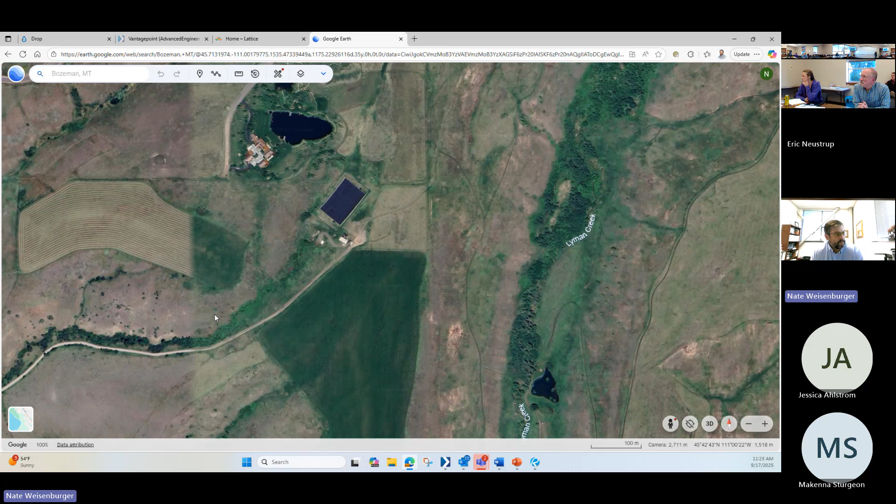There's a treatment building located to the south of that tank, where the chemicals are stored and the equipment doses chlorine into the water to provide disinfection consistent with what the sourdough plant provides on the south end of the community. The transmission line comes down into the community, crosses the interstate and railroad corridors, and enters the city's distribution system on the northwest or northeast side. Under average demand conditions, it provides adequate working pressure to pressurize a good share of the northern end of the community.

There's a Pear Street pump station located up in that northeast side of town, recently improved. During peak demand, that pump station can elevate the pressure to boost the system line from the Lyman system into the distribution system. Griffin, you might have a good understanding - I can see you with the way the owl is looking - do you have anything to add about the Lyman system?

Only thing I would add is that prior to the transmission getting to Pear Street, it does provide distribution support along the way. But yeah, that's a great summary, Nate. Thanks, Dave. You're welcome.

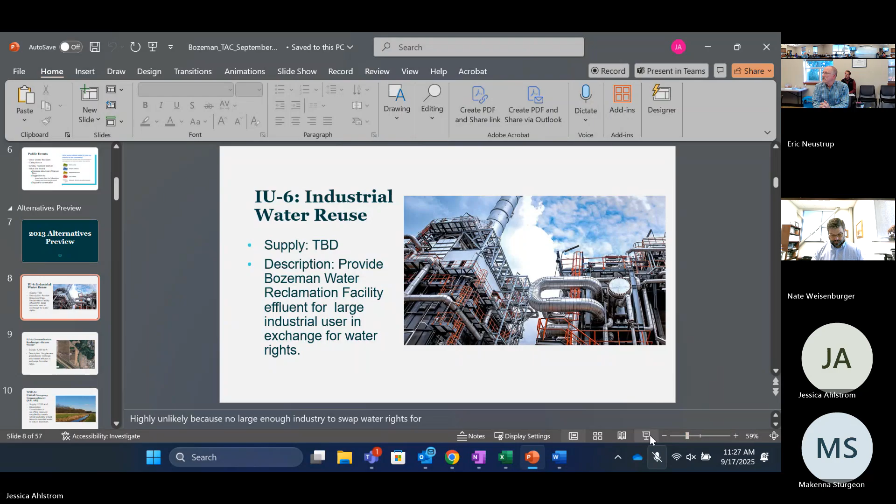One other general question - in going through some of the issues we've already covered in more detail, I've been generating questions. I don't want to bring them up in this group right now, but what's the best way to bring them to the table? Should I put it in a letter format, email it, and to who, the group? If you could get back to me on what you think is the best way to address that, that would be great.

Okay, so IU again stands for integrated utility. 6 is just the 6th integrated utility alternative that was developed previously. And integrated utility alternatives largely surround reusing water reclamation facility effluent to work.

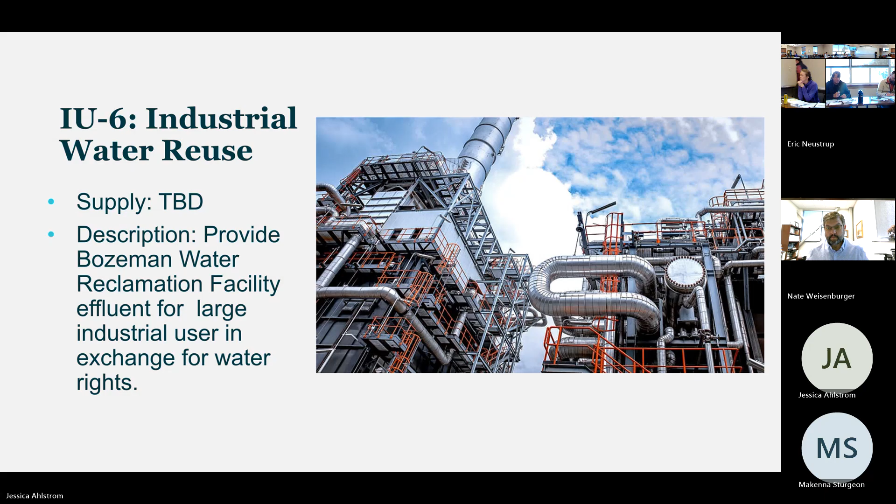I guess one of the buzzwords in the industry right now is data centers. Some data centers use water on a closed loop basis, but some use it on a pass-through basis for cooling. So you could consider some type of industrial reuse for supporting a data center interested in locating into the Gallatin Valley area. Great idea, though I think there are limitations on Northwestern Energy's side to support data centers - there's been a couple articles about that.

That reminds me, one other question I wanted to ask is whether the city knows if we have any businesses out there with open loop cooling systems, using a fair amount of water on a commercial, maybe not industrial, basis for cooling purposes. I feel like that's something we're looking into more - like geothermal heating and cooling? Yeah, it could be geothermal or for cooling equipment, but my thought was that going forward, the city should require those systems be closed loop systems, so they're not consuming water.

Yeah, that's on our radar. A lot of the systems - I can't speak to Darigold specifically, though their use may indicate single pass cooling - but a lot of cooling systems are single pass cooling. It's cheap and fast and cools quickly. So yeah, I think that would be a great alternative to explore for the demand reduction side, with additional cooling regulations.

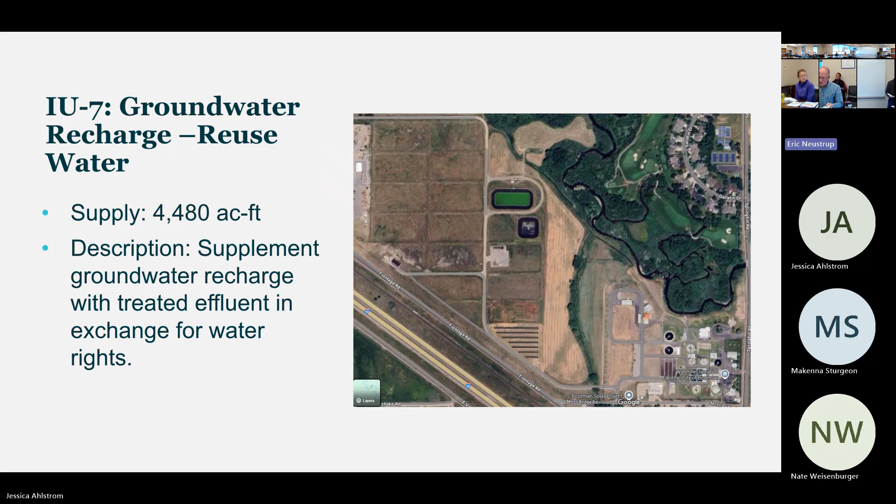Okay, shifting to the water supply development category of projects or alternatives. We went through 1 through 5 last month. Now we'll go to the rest of them, 6 and 9 maybe.

The 6th was something called the SALAR project. SALAR was a private entity formed by some local developers and other folks in the valley. I don't know all the details, but it proposed creating an offline reservoir that would draw from Farmers Canal and some other canals, or maybe even Gallatin directly, in order to sell that water for municipal or ag users. That project, to my understanding, kind of just fizzled out because the private entities that were involved stopped pursuing it.

I think the city's perspective is to continue considering some type of this, or some version of this, as an alternative. Maybe not exactly the SALAR project, but generally the concept of optimizing the use of canal rights. Again, legal challenges, physical challenges, obviously.

There's a lot of, we just mentioned a little bit ago, public interest in storing some of that runoff for later use. So this alternative was addressing that pretty directly. There's quite a few benefits to keeping this one.

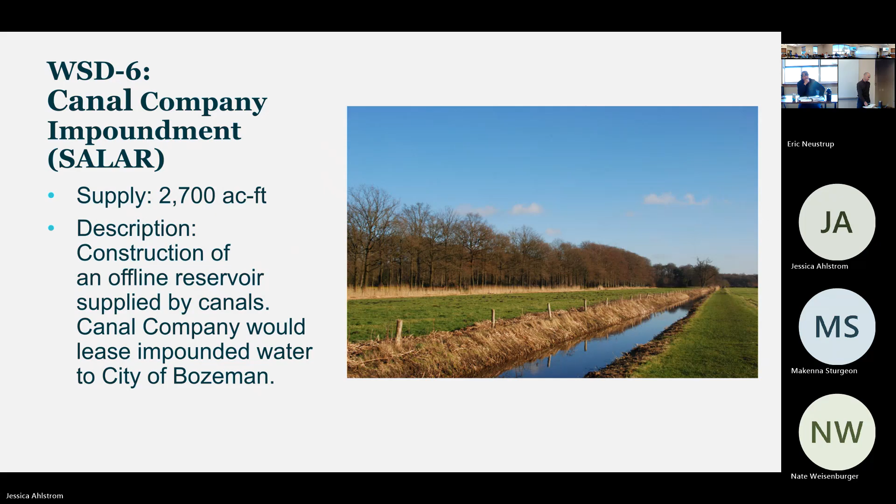WSD-7 is similar to one of the previous ones, which was Sourdough storage in the Sourdough basin. I think the difference is one is more traditional dam reservoir and one is more distributed storage throughout the canyon, which we talked about last time with beaver analogs and things like that. So this one applies up to 6,000 acre feet.

Brian Houston will talk about the city's water rights, but on paper we have a water reservoir storage right in the Sourdough Canyon for 6,000 acre feet. So this is like the lowest-hanging fruit from a legal perspective to attack and expand water rights, water supply. Again, could be used for mitigation, doesn't necessarily have to be developing new supply in Sourdough.

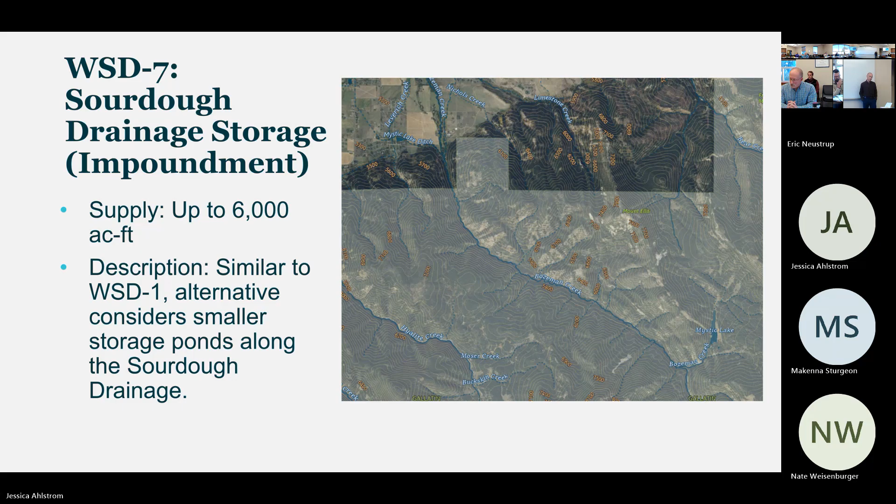Highland share purchasing - this would be purchasing additional shares from the ag users on Highland. The supply is 3,600 acre feet, which is the remaining shares that are owned by other users of the reservoir. As the city said, this has always been kind of a high priority for them to seek additional shares when available, and I believe it continues to be a high priority. In fact, it happened between 2013 and present day - some shares were purchased.

I was just going to ask first, I couldn't remember - I'm trying to find the terminology here, but it talks about there's like a penalty calculation built in there, or a water loss. I couldn't remember what that was all about. Do you? There's lots... trying to find the right terminology here. The storage - explain that, I don't know the history, maybe people know.

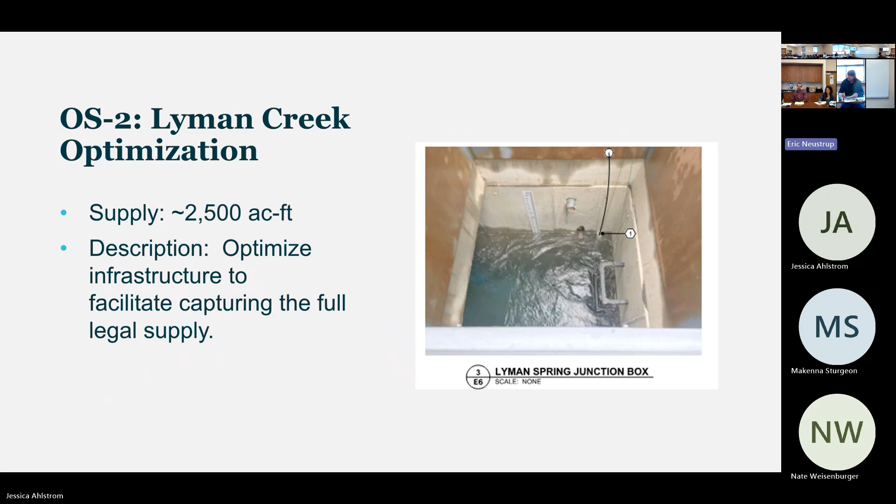So would that be one to just take off the table? That's maxed out. What's that? That is maxed out. That one's not.

Okay, so when you say it's maxed out, I remember picking up that part of the issue was that you couldn't capture all the water because there was nowhere to put it. There was some overflow that wasn't captured. Yeah, that's just the nature of the configuration of that junction box. Right, that was shown on the screen there.

There's a V-notch overflow weir, and then the transmission pipeline down to Lyman tank. We can't have the water level in that box dip below the soffit at the top of that pipe. Otherwise it starts sucking air and it causes operational problems to downstream, and process improvements at the treatment plant.

Yeah, that was the limitation that the instrumentation and controls project helped optimize. Is that water supply quite steady throughout the year? No, it's very variable throughout the year.

Okay, so the numbers we're talking about are to be received during spring. So we use that water supply every single day of the year, and we maximize its utility up to the full measure of our water right. When the source is producing the full measure of our water right, we take it and send it to town. When the source is only producing half of our water right, we still take every bit that we can and send it to town.

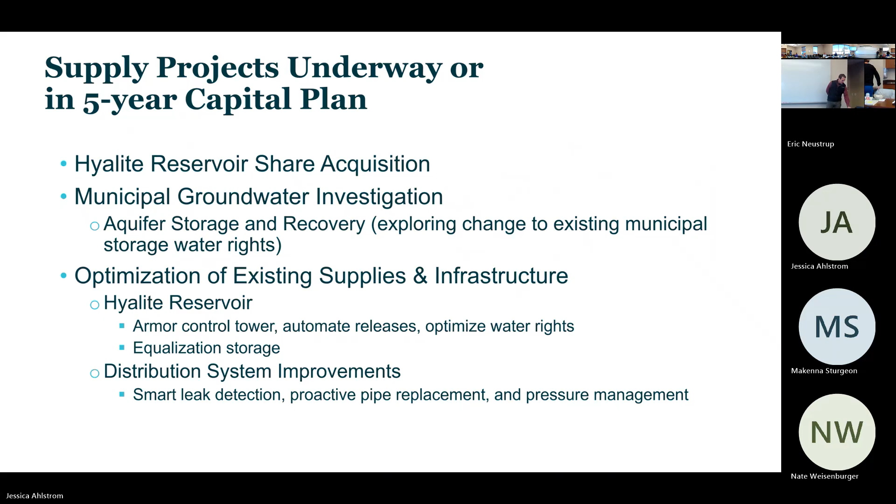The next slide talks through some alternatives, both ones covered in the past IWRP, as well as some concepts city staff has thought about or is interested in having the TAC consider more closely. Several of these we've touched on already, but I held off bringing anything up knowing this slide was coming, and to let the team have open dialogue before we got into it.

First one on our list was Sourdough storage, a slightly different flavor than the alternatives Zach covered earlier for beaver dam analogs or wellhead dams. City staff is still interested in revisiting the idea of a large storage reservoir up in Sourdough. This comes back to the theme that storage is probably, from the operation and city's perspective, the easiest tool in our toolbox to manage our supplies.

We recognize it's a challenging project politically. But speaking conceptually, we're looking at our water supply future and the fact that we're storage limited here in Gallatin, and the flexibility that storage provides a municipal utility with managing its water availability. We believe it's worth a conversation with this group to see if there's support for a larger dam and reservoir in Sourdough Canyon. But again, the political element of that would be challenging.

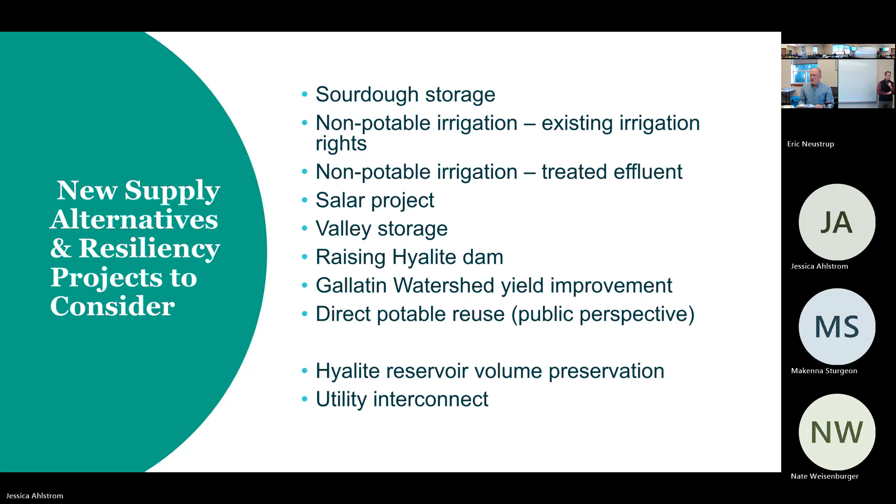I guess one last call for questions on that. I'm already kind of constrained, we still want to get through the rest of the agenda. Yes, did my time. Okay, so similarly, I was going to... thank you, I owe you. Similarly, I was going to present, just quickly as a reminder for the group, on conservation measures and alternatives we're already pursuing, as well as ones that we think might be good to evaluate.

I think also, as I think about the context of supply alternatives, everything we've been discussing in conservation, any of these conservation measures, I just think that's maybe good to keep in mind as we consider what might be reasonable.

I won't read through this whole list, but essentially our current conservation program focuses on education, outreach, and incentives for retrofitting, whether that be landscaping or indoor plumbing fixtures. We're working on distribution system improvements and tracking leakage within that system, as well as, in more recent years, policies related to outdoor watering, and for new development, types of landscaping and irrigation systems that are permitted to be installed, ensuring that those are efficient.

So that's basically what this slide is conveying, right? That's kind of the suite of what we've been working on.

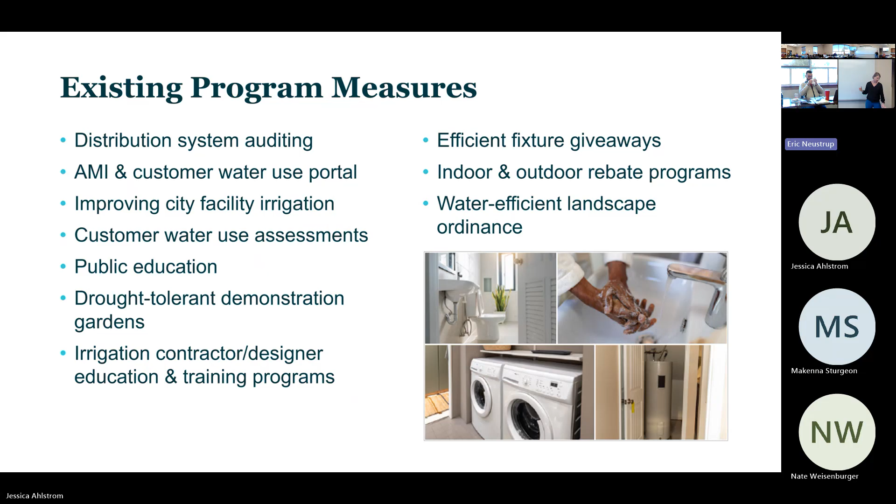Similarly, as I presented last month, our 2023 conservation plan has some additional program measures outlined for recommendation. We went through these at that time. If you'll recall, the big one is the one on the bottom of the list, which would make changes to our current water adequacy policy and require that the water demand of any development be offset in full through efficiency projects. That's kind of the biggest driver for the projected savings in the conservation plan, once that was slated to go into effect in the model in the plan.

But all of these things are currently on our radar as things we could pursue. Again, they're all on the table for this group to consider as well, which is a little bit different than the last integrated plan, because we didn't have a conservation program. So you guys have more work than the last one.

Can I ask something really quick? Does the low income leak repair assistance and installation program include detection? It could. We have sort of started building out what that could look like administratively, and it doesn't, but I appreciate you bringing that up. We could think about that. If nothing else, we could potentially have something built into our staffing time to look at different accounts that may have leaks by looking at our data and reaching out to them proactively. I think that would at least be an easy way of trying to do that.

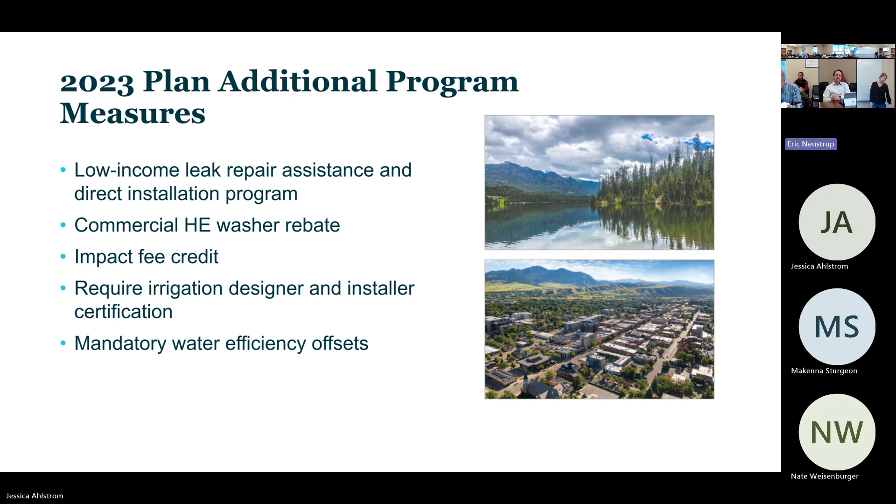These are some other measures not included in that plan for recommendation that we think would be good to consider. I tried to bucket them in terms of price signaling, rate structures, development, and retrofitting. We could look at doing a water budget-based rate system, which could require or not require irrigation sub-meters, which we currently don't have. So thinking about the costs associated with that, that would be an option that we think would be worth exploring.

On the new development side of things, potentially requiring the installation of high-efficiency plumbing fixtures, and implementing some cooling tower regulations that came up earlier in our conversation today, like prohibiting single pass cooling equipment in some scenarios where that's feasible. Again, we have to make sure that we could do this from a state requirement perspective.

On the retrofitting side of things, we could look at requiring that fixtures be retrofitted on resale. Some cities do this, or on a name change on the water account. Issuing rebates for cooling tower sub-meters or conductivity controller sensors - when those towers are not maintained well, they really use a lot of water, so that could be kind of low-hanging fruit. Also looking at requiring landscape permits for retrofit projects, so if I want to redo my landscaping, I have to get a permit and make sure I'm in compliance with city standards. And then potentially requiring non-functional turf removal down the road as well. So all of these things are just things on our radar that we think would be worth evaluating.

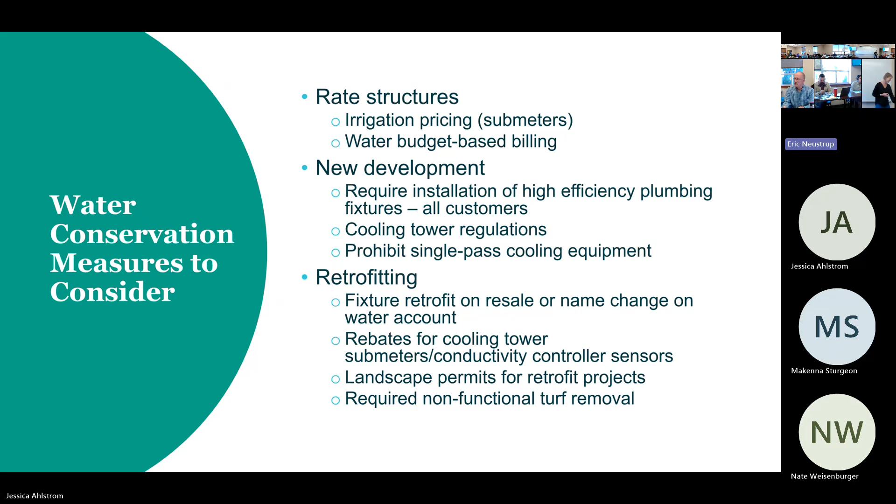Yeah, well, we've talked about a fair amount of this already, so where to start? Sorry, this slide's pretty busy with information. I wanted to keep it to one slide, not a series, so the way I've organized this is by watershed. The panel on the right map shows the 3 primary watersheds.

Lyman Spring, Bozeman Creek, and Hyalite Creek. In those watersheds, we have legal water rights to water sources for municipal purposes. So what I'm showing you on the left is the water rights owned, with one caveat, by the city of Bozeman that are available for municipal purpose.

The one caveat is Hyalite Reservoir. The city does not own the actual water right itself. That water right is owned by the state of Montana through the DNRC. The city does own a contract for water that is stored in that facility, and we'll get into that detail later.

Starting at the top of the list on the left-hand table, organized by sources the city has developed over time: Lyman Creek was our original water supply for the city of Bozeman, our oldest water right. We have two discrete water rights, one with an 1864 priority date, the other with an 1881 priority date. Both were senior rights on the source. That 1864 priority is one of the 10 oldest water rights in the entire Gallatin Basin.

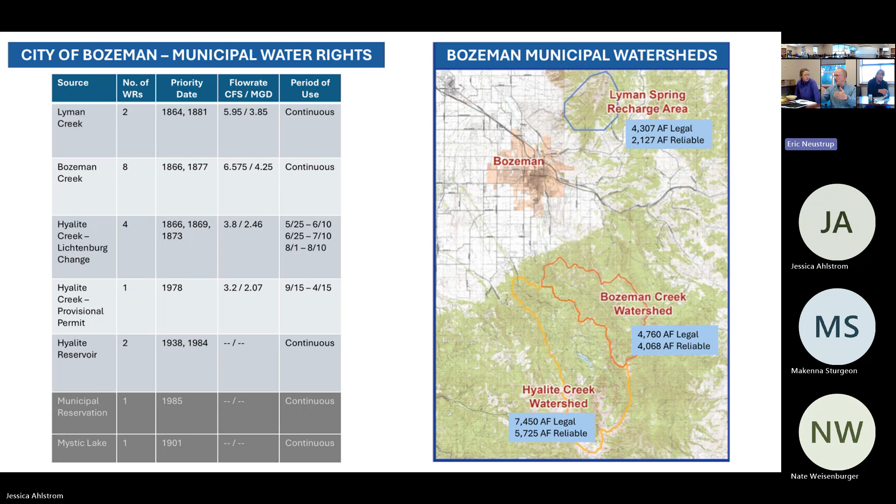Awesome, Scott. So if I hear you correctly, the city is currently pushing both of these opportunities equally to see which one is going to become viable, maybe both will be viable. And then at such time, if you can get the legalities worked out, then you would look at it from a cost perspective, one versus the other.

So on the surface storage in Sourdough, that project is not going to move forward unless we get an affirmative, positive recommendation here from the TAC and the IWRP. For the full single reservoir, you mean, or that or small units? I would say any impoundment storage there in Sourdough, whatever flavor this group is able to support.

Whether it be one big one or a series of smaller ones, or something in between - we're describing the strategy we're working on. Given what we see with the ASR concept and the groundwater project, what can we then do with anything remaining that this body would support? I find it interesting that on one hand there'd be a lot of resistance to a new reservoir at Sourdough, but at the same time, as we discussed earlier, I think everybody would agree one of the most beneficial water structures we have in the entire basin is Hyalite Reservoir.

The people love Hyalite. We're supportive of it too, it's a useful way to manage water, especially when you factor in climate change issues - it makes those storage options look a little more attractive for future planning.